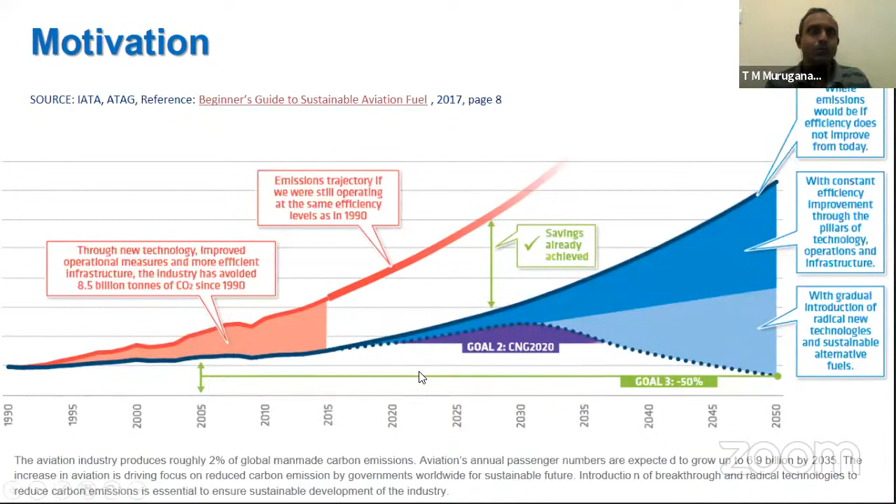So there is a continuous race for achieving carbon footprint reduction among the gas turbine industries. They're all saying they'll use alternate fuels or hydrogen blends, and that by 2035 they'll have engines operating with hydrogen blends, maybe fully hydrogenized by 2050. So that's one direction we need to push gas turbine technologies.

Next, everything is getting electrified nowadays, including all kinds of engines, so why not gas turbine engines too? We are looking at starters for gas turbine engines instead of using compressed air for starting the shaft. Next, seal performance is typically done only by computational methods; now we are going to do experimental work on that as well.

So what are the main changes that the industry will face if we are going to implement these? What we'll see is we'll have to inject gas instead of liquid. Not a great deal, but we need to think about how it works. It's not the same spray nozzle.

If we have hydrogen, it's going to have higher temperature, higher flame speed, burn rate will be higher, heating rate will be higher. All these will cause temperatures being much higher, and that actually means you need to have better thermal management. One more thing that happens with the higher heat release rate is your work output per kilogram of fuel will be higher, which means the cycle will be different.

It may end up with a higher pressure and higher RPM for the whole gas turbine engine operation. And then we need to worry about the seals being able to operate at higher heating rate and higher RPM. So these are all things that we need to worry about.

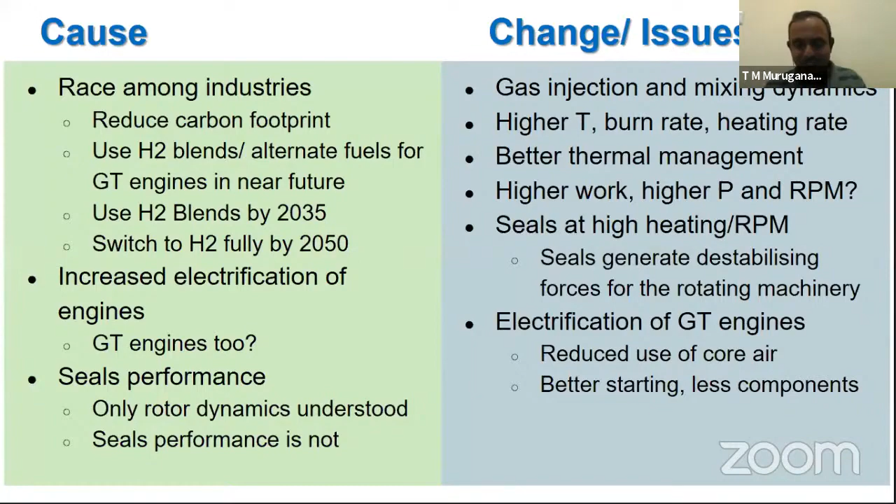Next thing is if we have to have a starter for the gas turbine engine, then one good thing is we will have less core air being used, but we need to think about how we are going to manage this. What am I going to do with it while it is not being operated? All that will be taken care of in this. We are thinking it will decrease the number of components in the gas turbine engine.

The four verticals in this particular gas turbine initiative are: first, the gas turbine combustor, where the predominant effect of making it hydrogen blend or pure hydrogen will be studied. Next would be to handle the heat that's generated.

It will be like heat transfer as well as waste heat recovery, done in vertical B. Then there is vertical C, on high temperature, high speed seals, handling what's happening inside the engine.

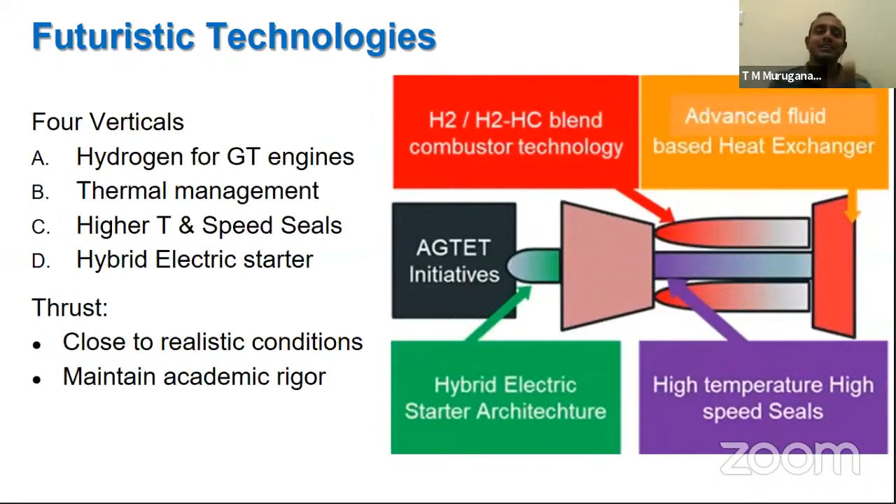And then there are starters, which are going to work either as a starter or as a generator — that's the idea of that vertical. The overall goal through all of this is to work as close to realistic conditions as possible while maintaining academic rigor. So we'll go into details of each of these.

First vertical is Combustor Technology. Here we're going to generate some combustor configurations which will work with hydrogen or hydrocarbon blends, or probably alternate fuels like SAF, etc., making sure we have low emissions, very good operability and durability of operation.

All that along with we have to now be able to test this combustor. So we create a rig like this, which has high temperature air incoming at reasonable pressures. We are creating a test condition chamber where we will have this test combustor, which can just be plugged in and tested. That kind of configuration is what we are envisioning right now.

And we will have to have a blending station outside, which will blend the fuel if it's going to be a hydrogen hydrocarbon blending system. And then we have to make sure we have continuous flow of at least 1 kilogram per second, 10 bar, 600 Kelvin air supplied, along with whatever equivalence ratios, air fuel ratios that are supposed to be done for each test for the particular combustor.

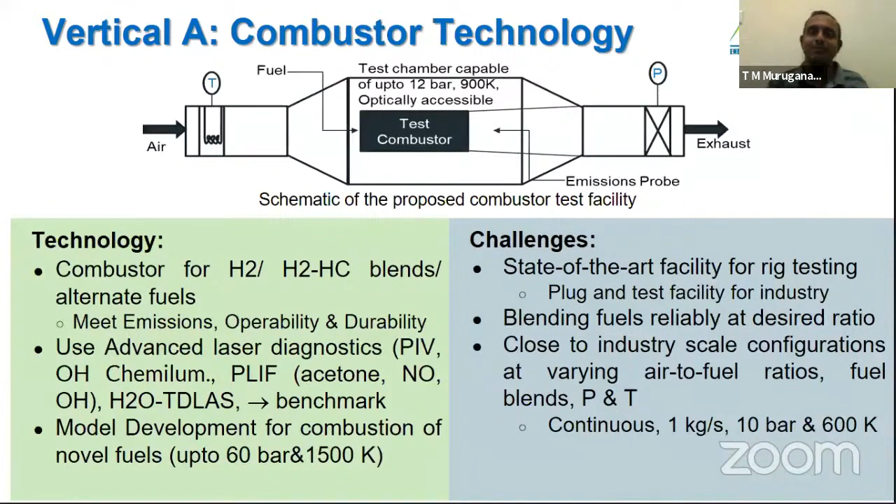While we are putting that in there, we have to use advanced laser diagnostics like PIV, chemiluminescence, etc. We are also going to have more models being updated for hydrogen blends, etc., up to higher pressures than what even can be achieved with this test.

The deliverables for this vertical would be that particular rig, which is a plug and test kind of rig with conditions as close to industry conditions as possible. And then we will also arrive at some configurations for the combustor up to TRL 2 to 3 kind of situation. And we will get a lot of benchmark data which can be used to modify combustion models if necessary.

After the first phase, that is 2 years, after that, when we go into the future, we are planning to establish the full center in the research campus, which is outside IIT Madras current campus. And then we will establish a full facility with higher than 10 bar pressure, higher than 1 kilogram per second, and try to achieve up to 800 Kelvin temperature of air supply.

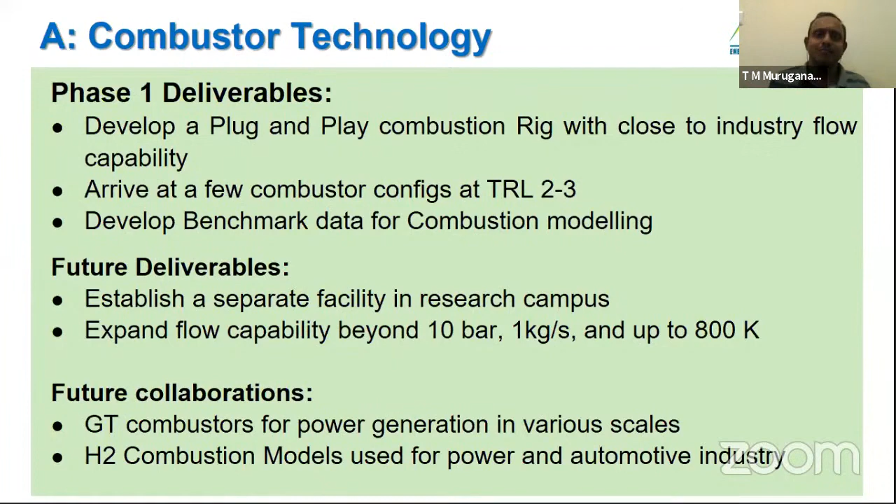In the future, we expect that we will have collaborations from other power generation gas turbine industries, or maybe this combustion model will be useful for all the other power and automotive industries as well.

When we go to next generation heat exchangers, this is required primarily because of the high temperature produced by hydrogen combustion. We need an advanced cooling system because the heat release rate is going to be higher, so we are planning to use supercritical CO2 based cooling devices to generate next generation heat exchangers using supercritical CO2 as the coolant.

You can see some of the coupons on the left here showing the kind of thing we are planning on doing. Phase 1 deliverables will first be creating a test rig where we can test this. Then we'll develop coupons for heat exchangers, test them hydraulically as well as heat transfer wise, all done by additive manufacturing.

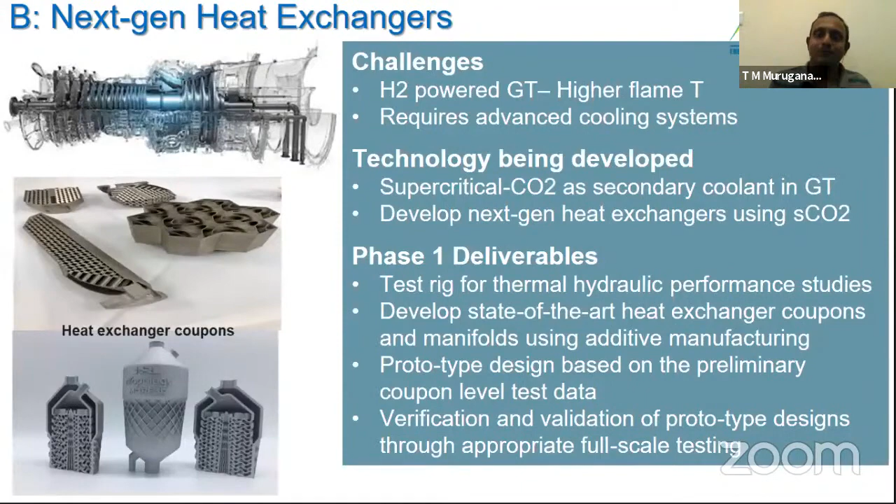Then we'll take this knowledge into prototype development, and check whether our prototype is working well through full scale testing. That's the goal. After the first phase, we are planning on extending it to waste heat recovery using this SCO2 cycle, shown on the left, and we can also add an organic Rankine cycle to the bottom to make it even more efficient.

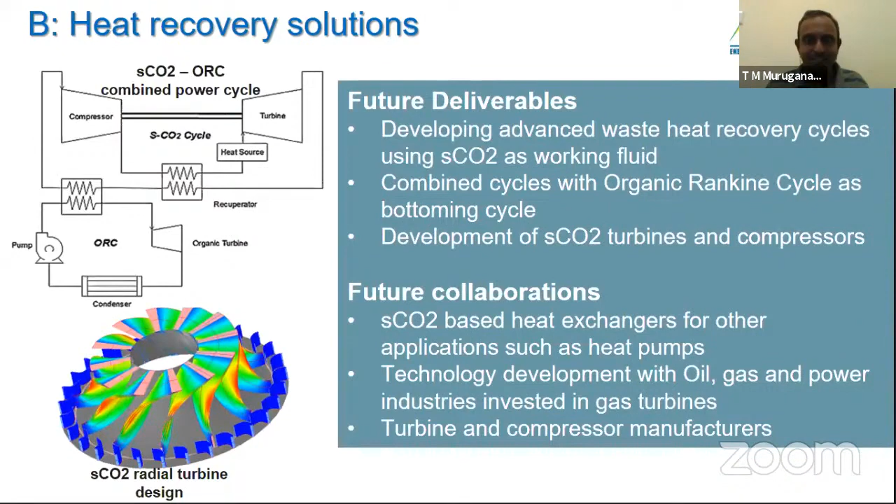We are also hoping to make contributions in supercritical CO2 turbine and compressor design, as you can see at the bottom, there's some work going on. After all this, we expect future collaborations in heat exchangers and heat pump design, which will be useful for oil, gas, power industries, and also for turbine and compressor manufacturers.

Next is seals performance, the third vertical. Here the technology we will look at is whether we can evaluate seals very well, and for this we need a test rig. This is a rare thing happening around the world, there aren't many rigs available, so we need a rig where we can test this at close to reality conditions.

We are going to have high pressure, high temperature air coming in, and test this air going through the seals at close to actual RPM conditions. So the typical rig would look something like this. You can see the seals are around here. My mouse doesn't seem to work suddenly.

So the seals are around here, what's depicted is a simple labyrinth seal kind of arrangement. Air coming in goes through very small gaps, and that's what it is supposed to seal. That's the idea, so we are trying to have CFD models. Of course people have already done work on that, there's a lot of literature on CFD work. The main thing is we'll generate some seals, put them in there, test them, and see if they perform well at these conditions.

And then that will also go into model development. What are the challenges? It's actually high-speed rotor, high temperature, high pressure, and clearances are very, very small. These are the typical challenges, so we have to be able to assemble this very well without damaging the seals and then test them.

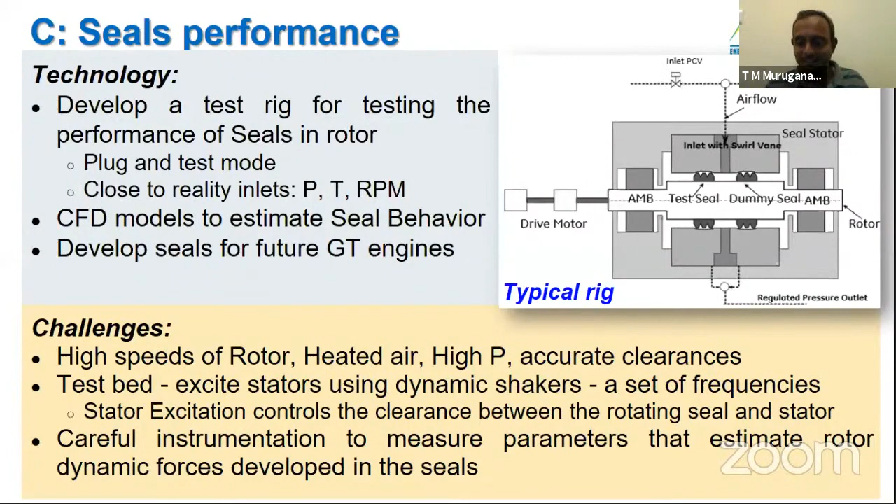We'll try to make this rig in the first phase, within the first two years, at close to high pressure and temperature conditions. There's also some parallel work going on in CFD, as you can see on the left, I don't want to get into that now for want of time. We will try to reduce the rotordynamic forces in seals and provide particular configurations useful for these operating conditions for future next generation engines.

This particular capability will actually be promoted into the CFD version as well after the data is given, and then we'll get engine manufacturers to see that it will give fuel economy and weight reduction.

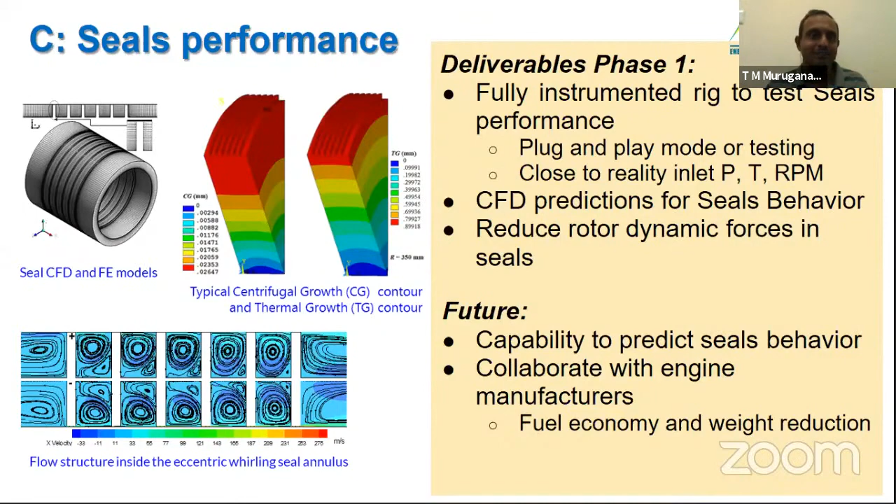I'm assuming that Kamalesh Hatua is not there, so I'm continuing into this particular part.

This particular aspect is like electrifying the starter generator for the gas turbine engine. Typically we'll use compressed air for starting the engine. Instead, now we are going to have batteries, which will have that battery energy converted by a converter into AC, which is going to drive an AC motor that runs the shaft initially.

But once the engine starts operating and giving shaft power, that's going to be converted into a generator instead of a starter motor. That will produce electricity, which is converted back to DC and stored in batteries or supplied to the aircraft via a primary power distribution system. The voltages are given out here.

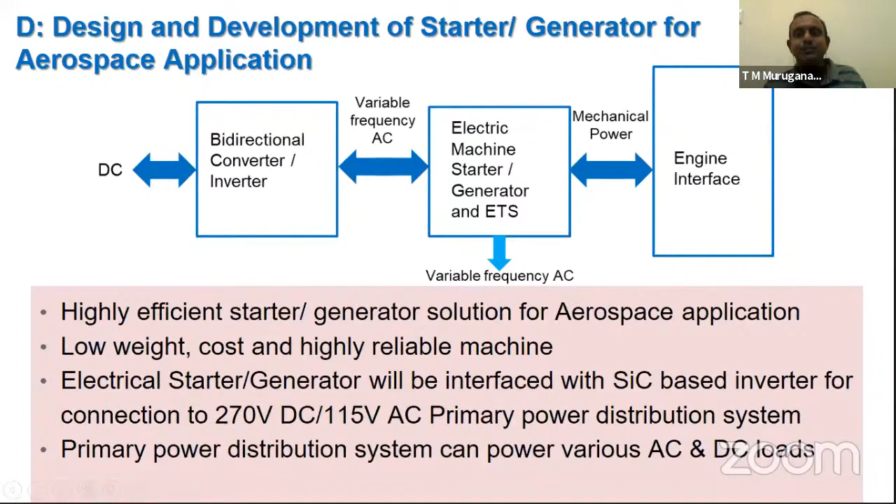This primary power is supposed to have some variable frequency - we'll just ignore that for now. They are using silicon carbide based inverters inside there, which gives higher energy efficiency and very good compactness inside the circuit.

If you look at the maximum generator speed they are targeting, it's around 20,000 RPM. Targeted system efficiency is supposed to be more than 90%.

In the first phase, they are going to work on just the technology architecture, design the whole thing, and go only on paper design, but test it simulation-wise, going all the way up to TRL3. After that, after the first 2 years, first phase, they'll go into prototype development and test it, extending it all the way up to TRL5.

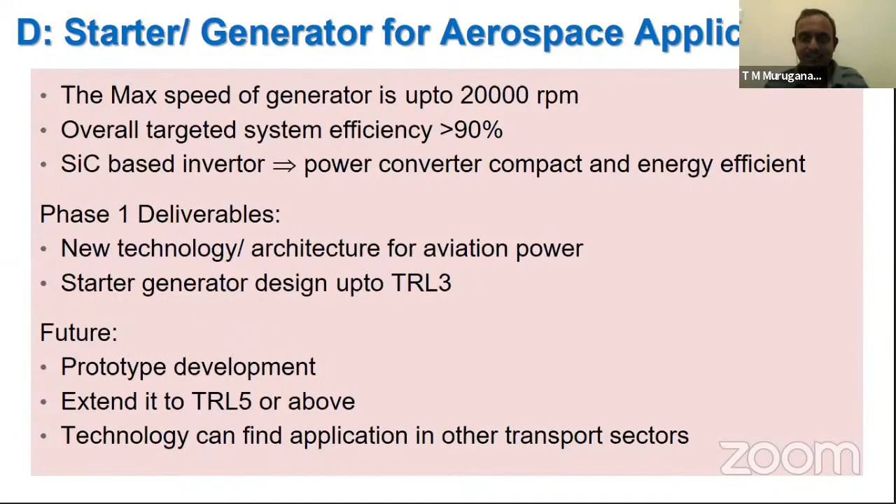That is, they do repeated tests in there. We hope that this particular technology will be taken up into the engine. And in that case, it may also be useful for other sectors based on this particular architecture - other transport sectors may also be using it.

We have a major collaboration partner, that's GE - GE Aviation from Global Research Campus, Bangalore, India. They are interested in all 4 verticals as of now, and they have given support in several ways, like direct cash contribution for supporting student hiring and operational budget, and also in-kind contribution in terms of design support and fabrication support for some special fabrications.

Opportunities for others: there will be a webinar series for dissemination of information, there will be internships possible in this center, and collaborative efforts possible with other universities if others are interested. For international collaborations, there will be webinars which we will be organizing after this, and further collaborative efforts which will be encouraged.

There is a new thing that our director has introduced - this young international faculty position. This is like somebody who is currently at a postdoc level and is interested in joining a faculty job in the center, and they are paid reasonably well in this center. There is also student exchange programs with different universities, which are welcome for these centers.

This is the last slide I have. I just want to say that this is a unique center which has all these key technologies needed to push gas turbines into a new regime. There are 4 verticals, and each of them individually can be industry oriented, with several industries potentially having spin-offs from these technologies that they can use.

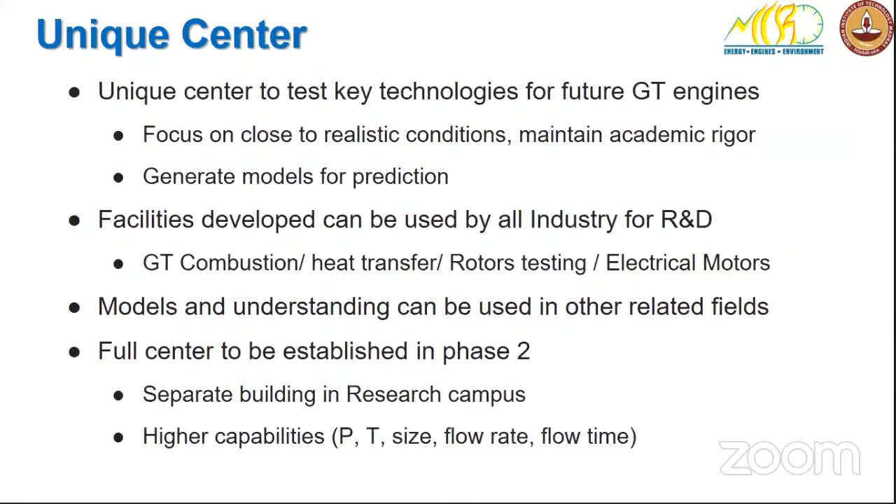Yeah, so the idea is that, from our standpoint, it's primarily the students working in Chennai on the IIT campus. We'd be happy to have them work with our team and visit our Bangalore site as needed, but primarily the action happens at IIT.

Okay, great. Let me move back to some more technical questions. Maybe let's just talk about the hydrogen itself, where it's coming from. Are you looking at...

Maybe just talk about, are you looking at onboard hydrogen production, or would you be taking cryogenic hydrogen that's stored on the plane? Maybe just talk a little about the production side of things.

Currently we are trying to enable the combustor technology right now. Yes, there are these two technologies being talked about: one is onboard hydrogen production using electrical energy coming either from solar or from the engine itself, which I think is detrimental. The other aspect, storing it, I think will cause more trouble. I think it should be onboard production, but I'm not the expert on that right now. I'm going to create this technology so people will think, yes, there is combustor technology. Now we just have to work on the tanks that are coming up.

But onboard production from what? What would it be coming from? Like ammonia, natural gas, or some liquid fuel? Ammonia is a nice option, except for the NOx if we can control it. There is also electrolysis. Ammonia is easy to store, is what I hear. You mean actually carrying water aboard the plane? Is that what you're saying? Yeah, the ammonia is also easier to carry. It also gives you some energy in the process of producing water.

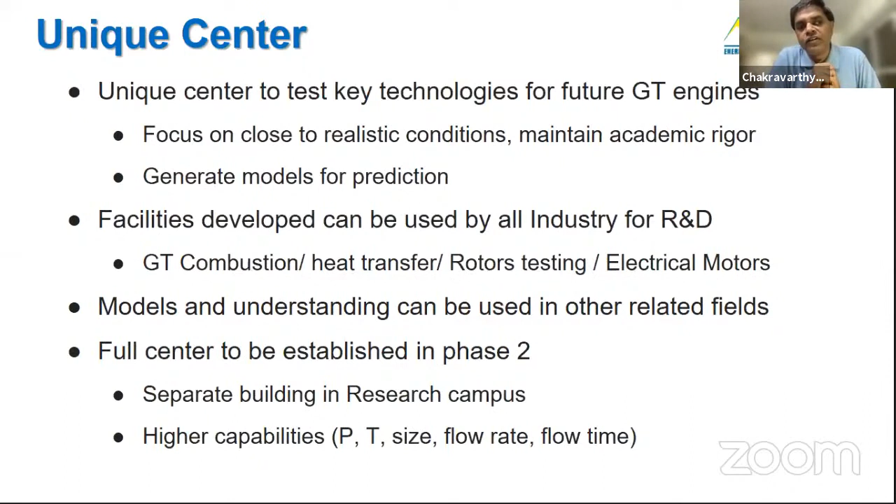Great, let's talk a little bit more about hiring. There's a question here on when you're planning on hiring professionals and young faculty, and what's that timeline?

Okay, we are already hiring people who are going to work on the project. For young international faculty, there is a particular procedure that we have to follow. If somebody is interested, they can contact us and we'll start the process along with you, and go through the procedure as prescribed by the institute. Since it's going to be equivalent to a faculty position in the department, we'll follow the regular procedure given by the institute. It can be done even now.

Great, there's a question here about 3D printing as well, particularly on the seal side. You talked a little bit about additive. There's a lot of really exciting things around additive associated with heat exchangers, combustion, and fuel injectors. What about on the seal side? Is there an additive plan for leveraging additive manufacturing for better sealing strategies? Professor Shekhar?

Professor Shekhar? Yes, I'm here.

So the question had to do with whether there's a plan to explore the use of additive manufacturing around seals and seal technology. I don't think so, GE can answer to that. We don't have any idea of additive manufacturing there. I'm hearing of seals being printed on shafts only now, but I'm not sure of that. I don't think GE guys have anything either. As far as my knowledge goes, it won't be additive manufacturing.

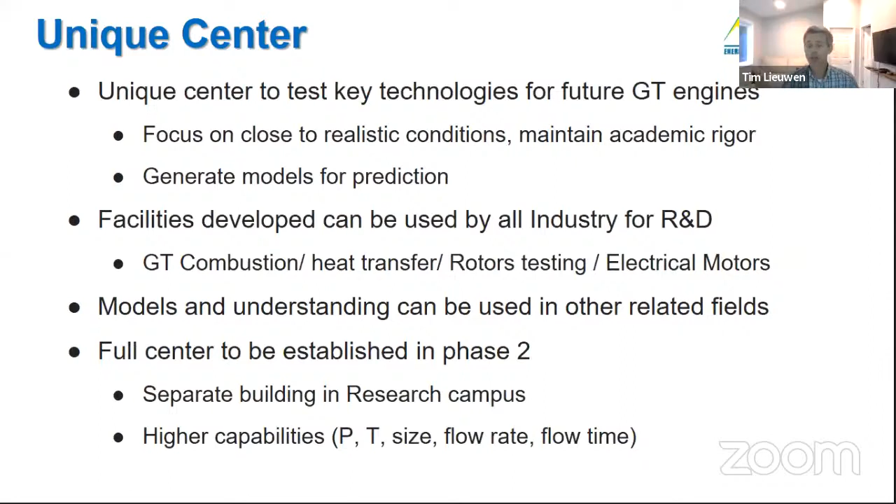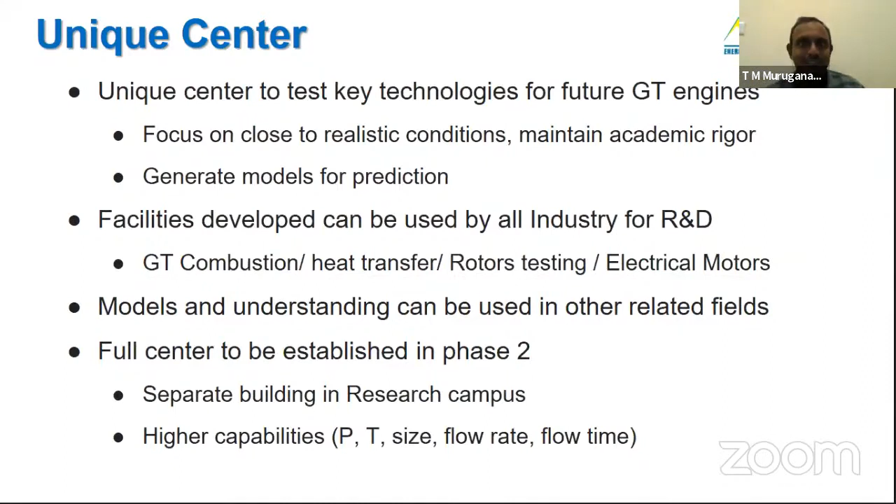Thank you, Tim. If you have to leave for other meetings, you can leave, and I'll still continue answering questions here. Is that what you want to do? Oh, I'm sorry, I thought this session was over now. It's supposed to be over now. If there are some questions, we'll just keep answering. It's fine, but we don't have a hard stop. We don't have much more here. Respect your commitments - if you'd like to leave, I think Tim has pretty much addressed all the questions. Yes, pretty much all the questions are answered.

Is there any other comment left? There is. That is all, I think, I guess.